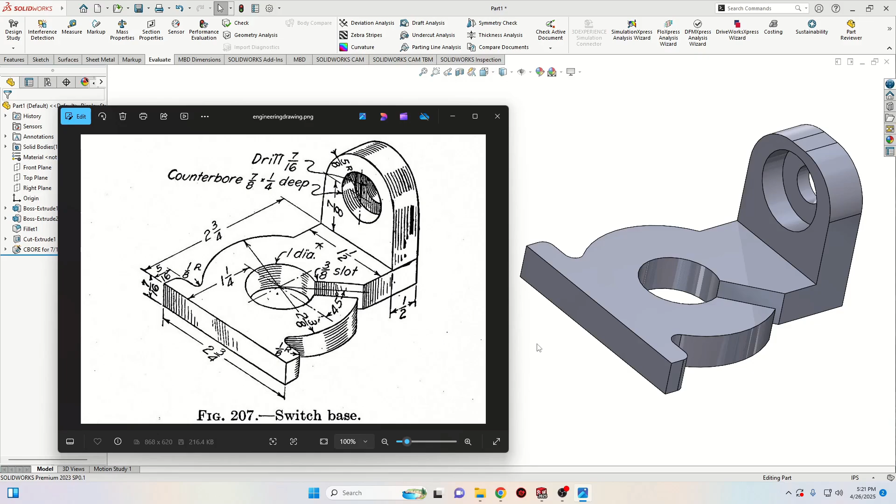First, let's open a new part. And here I'm gonna make it plain white because I can see better that way. And if your SolidWorks is in millimeter, gram and seconds, you'll have to go down here and select inch, pound, second. Perfect. After you did that, we'll go open a sketch on the top plane.

And here we'll start with 2 circles, just like this. And now let's go back to the picture and see the dimensions. First will be this circle, the diameter will be 2 inches and 3 divided by 8, and then the second one will be the diameter 1 inch.

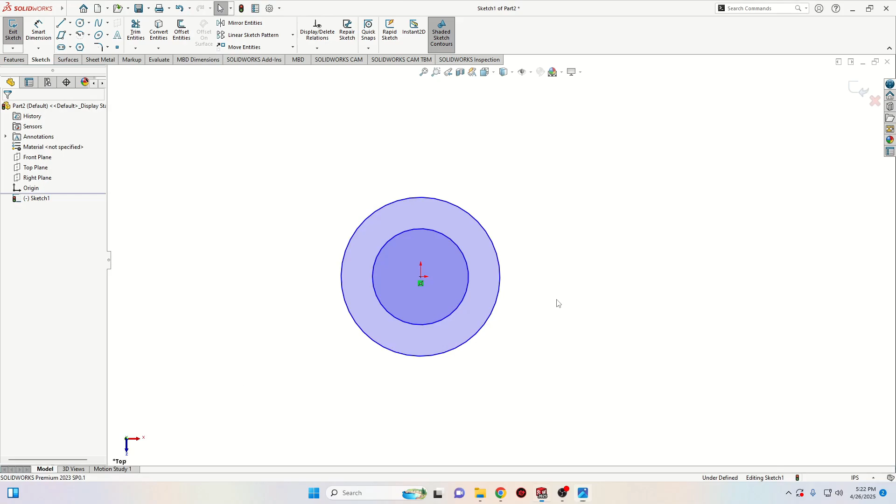So with smart dimension, here will be 2 and we'll add 3 divided by 8. I hope this is correct. And here will be 1.

Alright, and now let's get this a little bit out of the way. And let's make the next part, which will be this little piece here. To do this, we'll select line and we'll make the next sketch.

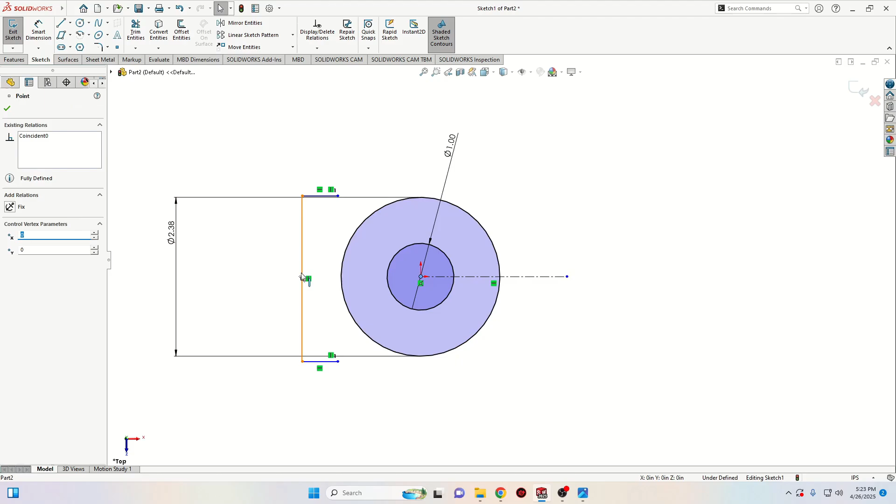Select these 2 points and select here, make vertical. Okay, and now let's select center line and let's make here a center line. Select this center point with this one and select here, make horizontal.

And now let's check the dimensions. So here will be 2 and we'll add 3 divided by 4. So 2. Okay, and then here will be 5 divided by 16. And then we'll have to add this radius.

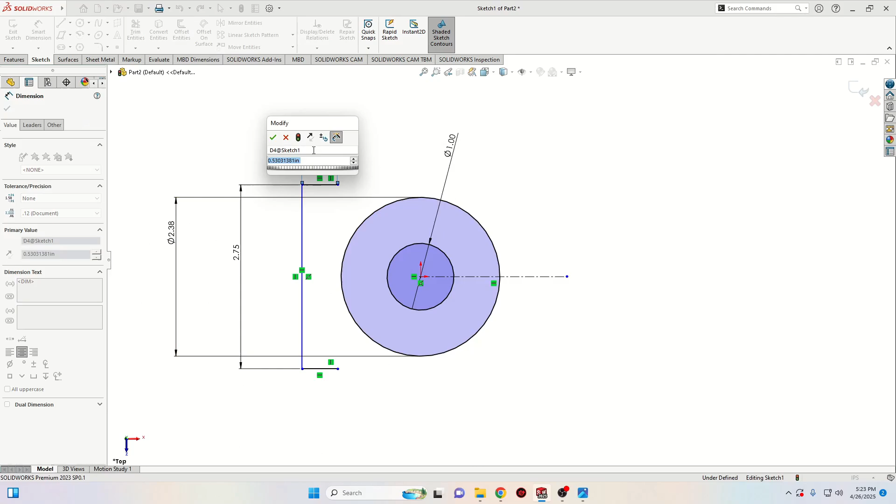Okay, select line and we'll make this line, and then when you go away from this point and you go back to this point, it's going to change into an arc. It's not working all the time how you want it to work.

Okay, and now we're gonna place an arc right here. And with this point on this circle, select this circle with this arc and select here, make tangent. Perfect, let's see, it was the radius 1 divided by 8.

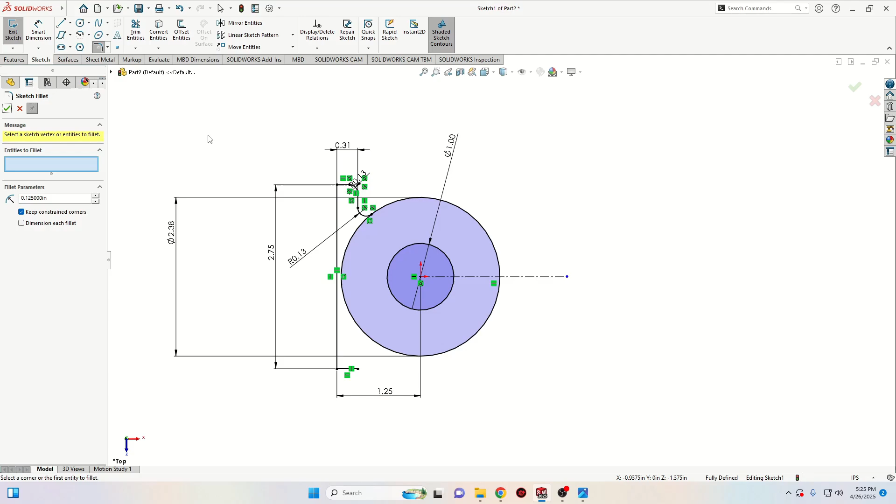Okay, and now this is fully defined and we'll have to use mirror to mirror this on this other side. But first let's add this sketch fillet. So select sketch fillet, we'll select this point, and here the radius will be this radius, 1 divided by 8. Press OK. Let me double check, yes.

And now we'll have to use mirror, so let's select all of this, and then with Control pressed from your keyboard, select this center line, and then we'll go up here and we'll select mirror entities command. And now everything is on this other side.

Now we'll have to do one more thing, so select line and make the next sketch. Select this point with this center line and select here make coincident. Select this one with this circle and select here make coincident. Do the same for this one.

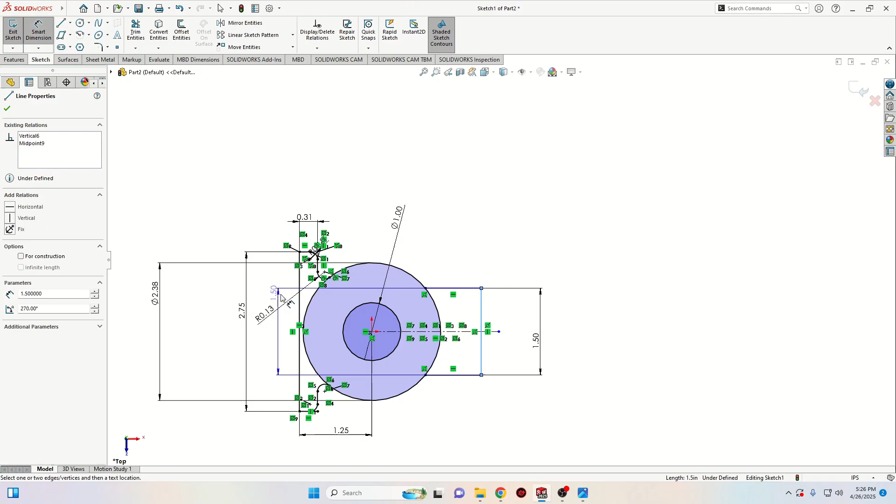Alright, and now let's see. We have here these dimensions is 1.5, and then we have these dimensions is 2, and we'll add 3 divided by 4. So here will be 1.5, and from this line to this other line here will be 2, and we'll add 3 divided by 4 if I remember correctly. 2, 3 divided by 4, yes. And now this is also fully defined.

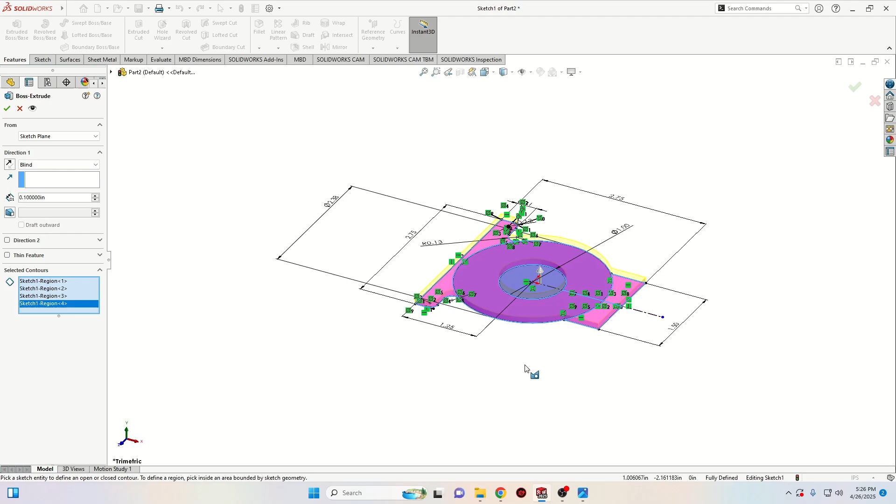Now this is something like the base. Now we'll go to features and we'll use extruded boss base command. And we'll have to select these contours to extrude them. So select all of this, except this hole. This one, don't select it. And here the thickness will be, you can see it right here, 7 divided by 16. Press OK.

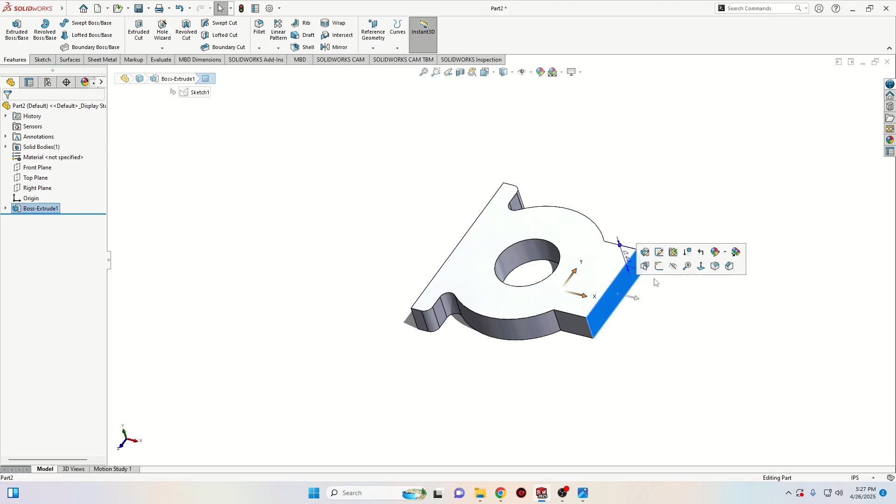Perfect. And now let's select this face and open sketch. And here we'll select corner rectangle. So we'll go up here and we'll select corner rectangle. We'll start from this corner and we'll make a rectangle just like this.

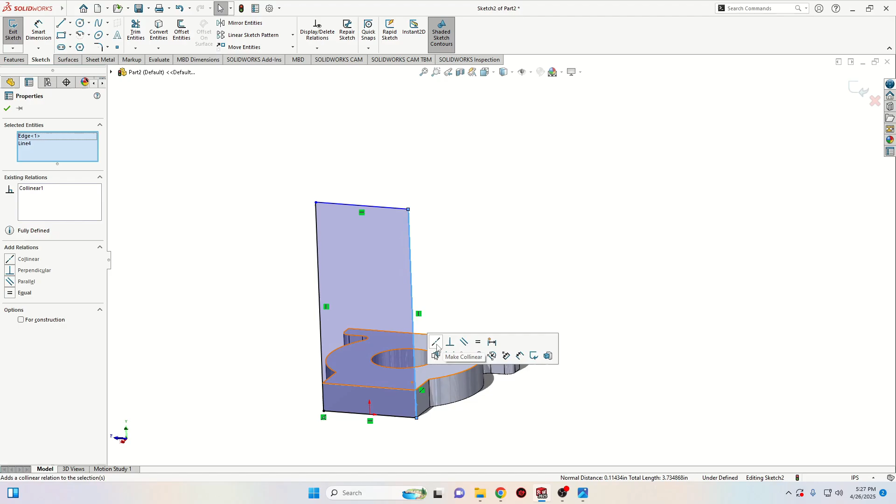Select this line with this edge and select here collinear. Okay, it's not working. Select these two and select here collinear. Okay, I think that the first time I selected this other edge or something. Yeah. Anyway, let's go back to see the dimensions.

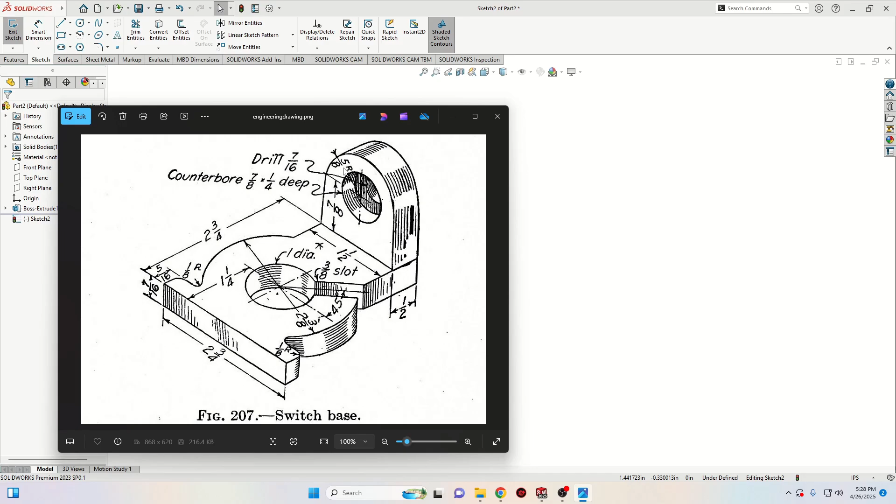So it's 7/8 until this center point, but we need the dimension until this edge up here. And to this 7/8, we're gonna add 5/8. So with smart dimension, let's give a dimension from this edge to this line. And here will be 7/8, and we'll add 5/8. It's 1.5 inches.

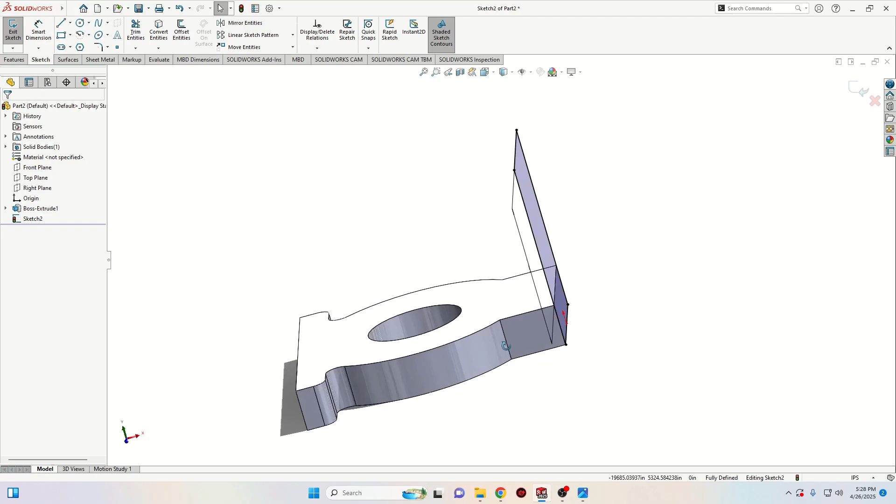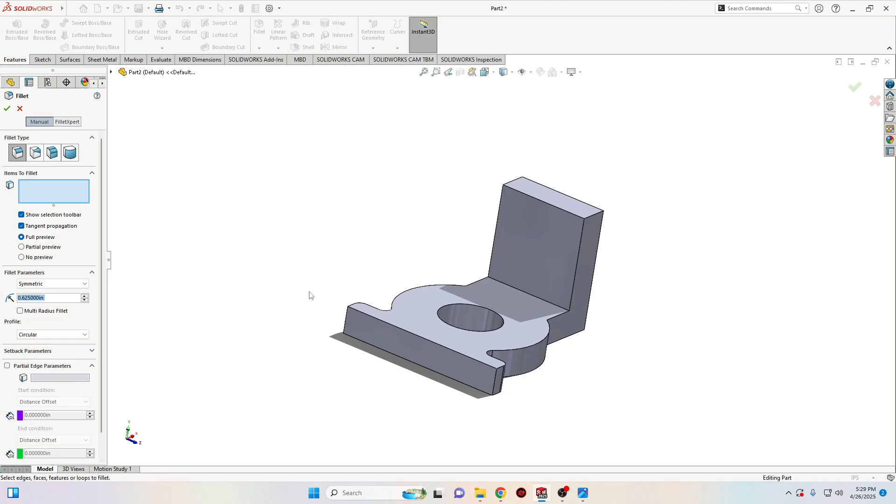Alright, and now let's go to features and use extruded boss base command. And here the thickness should be 1/2, which is 0.5. Press OK. And I'll have to make these fillets. For this we'll go to fillet and we're gonna use the radius 5/8. And we're gonna select this edge with this one. Press OK.

And now we'll have to make the counterbore right here. To do this we'll go to hole wizard and we'll select it. And from here we're gonna select this one because this is counterbore, as we can see. We're gonna select here the type. I cannot see it specified here, some kind of type. So we're gonna go ahead with hex bolt.

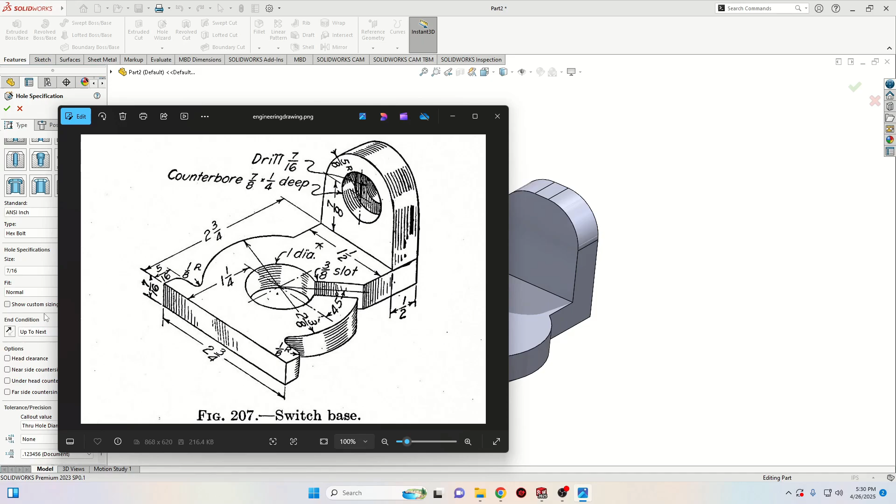And then the size, you can see here that the drill is 7/16. So the size we're gonna select 7/16. And then fit, we're gonna keep it normal, up to next. And I don't know if I should select something else here because we don't see anything else. I can see these 2 dimensions, but I'm not exactly sure what they mean. Maybe that's the head clearance, but I'm not sure, so I'm gonna leave it like this.

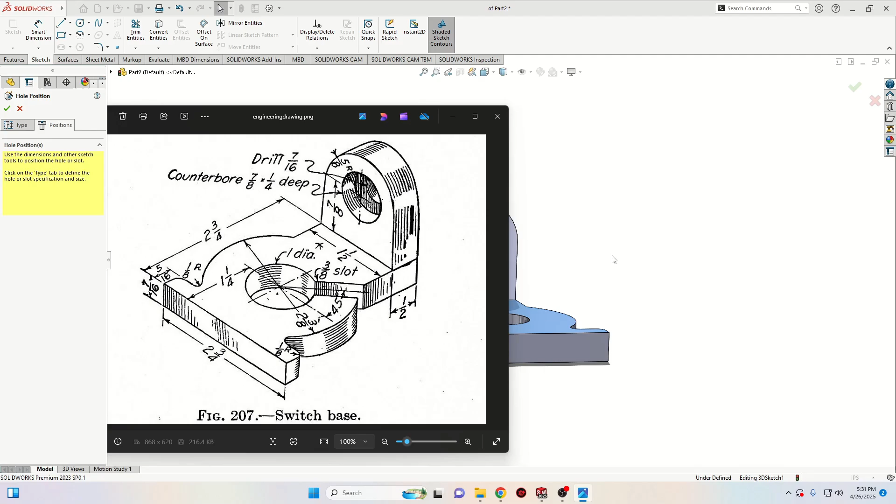To do this counterbore, we'll go to positions, 3D sketch, and we'll have to place it right here. And now to make sure that it's fully defined, we'll have to place it at 7/8 up from this edge, and it will have to be in the center. To do this, we'll first go up here and select center line, and we'll make a center line starting from this middle point, which will go up. Make sure that it's like this and it's black. It means that it's fully defined.

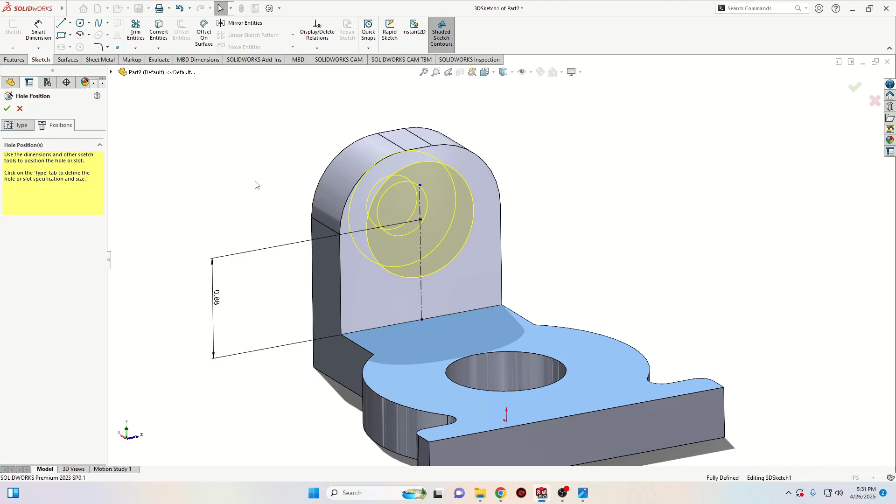Select this point and select this center line and select here make coincident. And now let's select smart dimension, and from this point to this edge will be, what was it, 7/8. Press OK. And now this should be the counterbore.

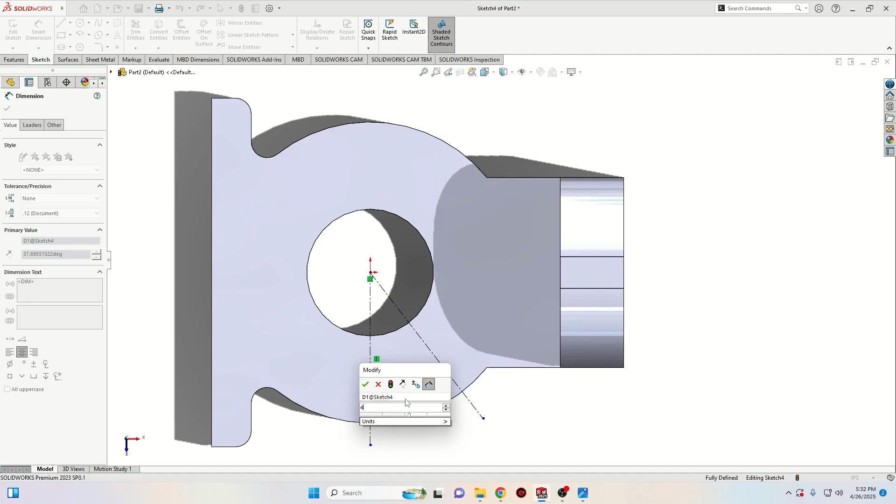Okay, now let's make the last thing. The last thing will be this slot, 3/8. So first we'll have to open a new sketch on this face. And now let's select center line, and we'll make 2 center lines. First we'll make one like this and then one like this. Now with smart dimension, let's define this one from the right. And here the angle will be 45 degrees. Yes, 45. And the slot will be 3/8.

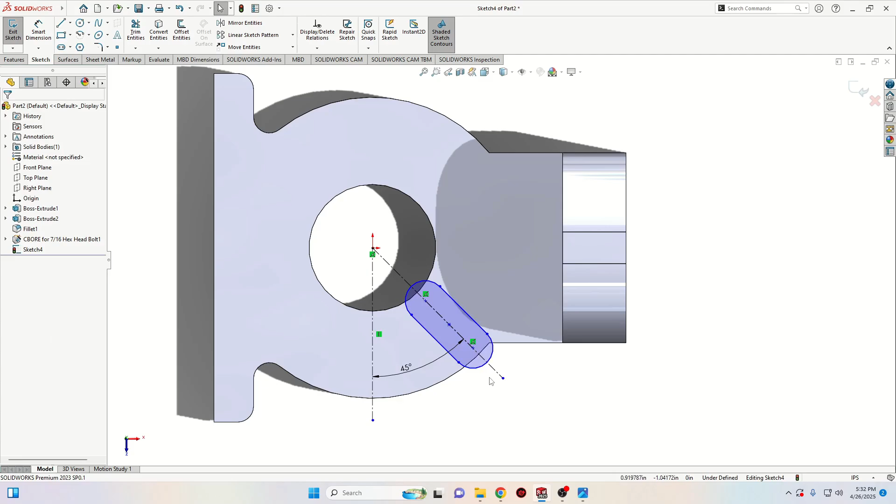Now let's see. We can select one from here, I think, straight slot. Let's see if it's working. Okay, if we drag it like this, it should be just fine. Make sure that these arcs are out of our part.

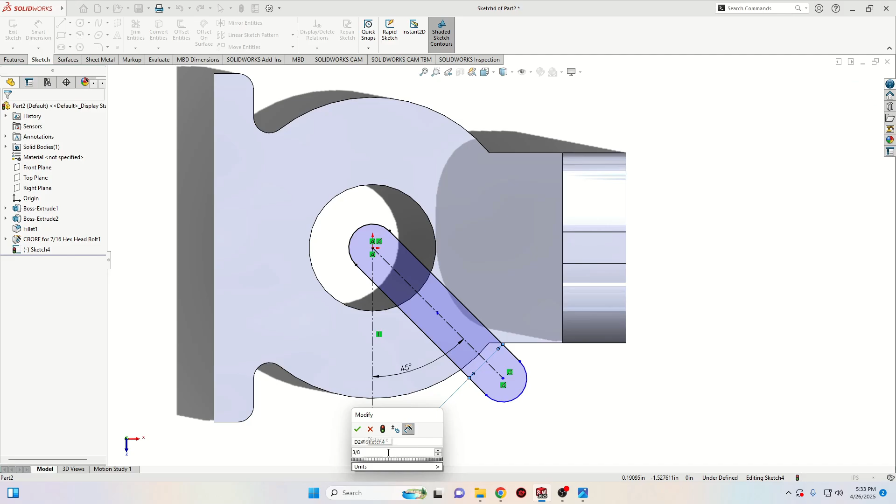And now with smart dimension, between these 2 lines should be 3/8. Right? 3/8. Okay. And now everything is good. Make sure that this is not inside here, but it's outside. Now go to features, use Extruded Cut, and here we'll select through all or up to next. Press OK. And now we have our slot.

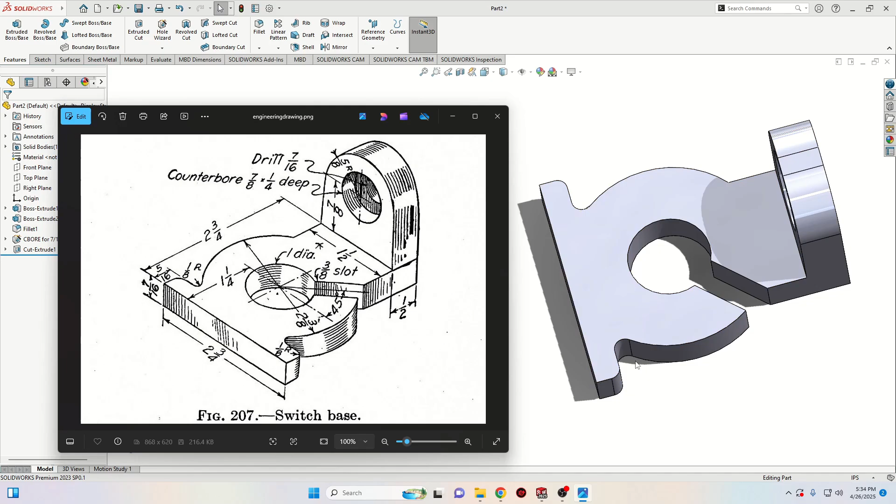Now let's take another look at the drawing to see if we missed anything. We have this right here. We have the hole here with the slot. We made the counterbore, and we made these 2 fillets. So everything should be okay. This was the tutorial for today.